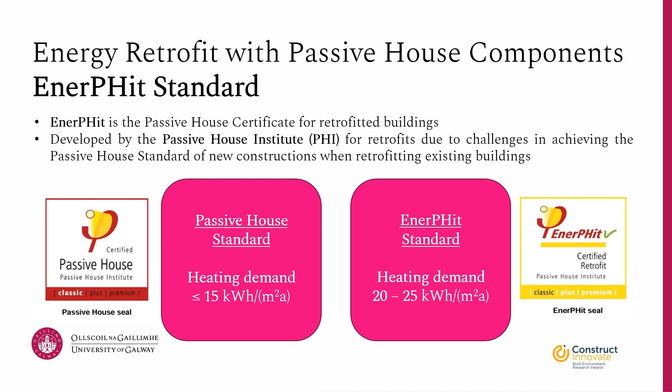As with passive house design, the EnerPHit standard can be achieved by applying the 5 key principles of passive house. So that means focusing on thermally insulating the building, using passive house windows, implementing an adequate ventilation strategy, focusing on airtightness, and removing thermal bridges through design.

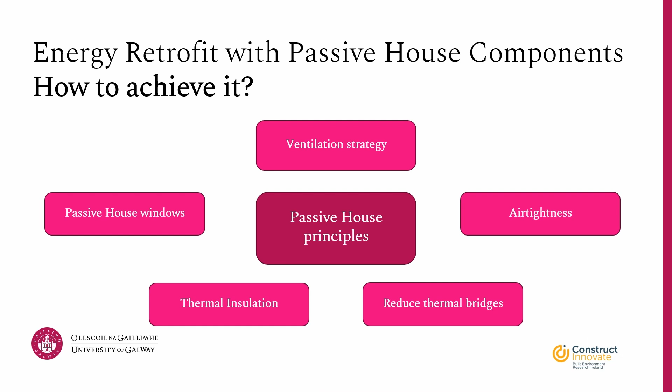So achieving the EnerPHit standard can have economic benefits. It can also result in an improved indoor environment through thermal comfort improvements, improved air quality, no mold growth, and a constant supply of fresh air. And it can also have significant space heating demand reductions as well as CO2 emission reductions.

As well as that, the EnerPHit certification process offers a documented quality assurance and acts as an important opportunity to apply higher quality and higher efficiency measures than you would otherwise have considered. And it also acts as an incentive for building owners to strive for a higher energy efficiency standard than they would otherwise have considered.

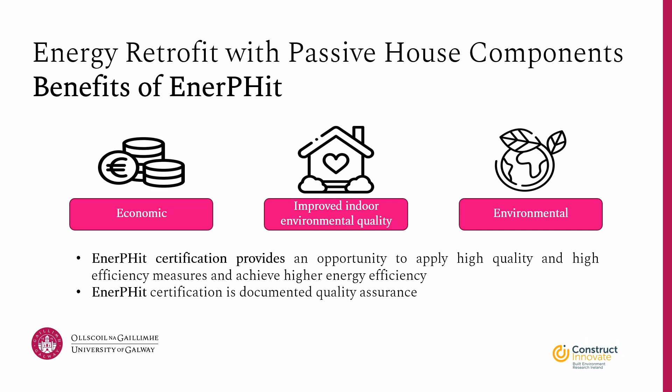So PHPP is used to determine the energy performance of the retrofitted building, and there are two ways that you can fulfill the EnerPHit criteria. So that's by component or by energy demand. In the component method, each component of the building, so for example your insulation, your windows, your ventilation system, must comply with a limiting value that's set out in the criteria and comply on airtightness and primary energy demand criteria. In the energy demand method, the retrofitted building should meet a certain energy demand that's specific to the climate zone.

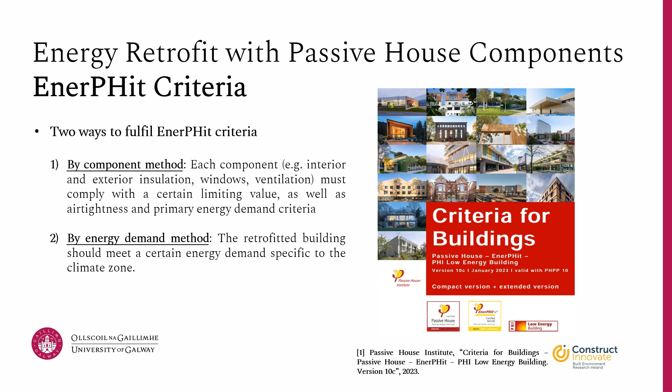So you can see that for the component criteria, specific heat transfer coefficients are presented for each envelope component, as well as for the windows, while minimum heat recovery rates and humidity recovery rates where relevant are specified across the different climate zones according to the PHPP. Ireland would be considered a cool and temperate climate, and therefore you would comply with those values specified for this climate zone.

So alternatively, you can use the energy demand criteria, and again, these are specific to the climate zone. So again, for Ireland, you would look at the cool temperate climate, and therefore you'd see that the max heating demand for an EnerPHit standard in Ireland would be 25 kWh per metre squared per annum.

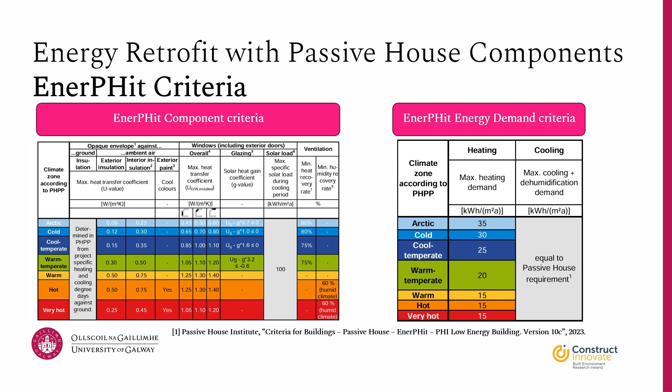So there are some exemptions specified in section 2.2.4 of the criteria for buildings that, where applicable, allow the heat transfer coefficients of the external envelope to be exceeded. So that includes things like legal requirements, if it's a historical building, if the required measures aren't cost effective, if the required insulation level restricts the building's use or the surrounding areas, if there aren't components available that comply on both EnerPHit criteria and other requirements, so it could be fire safety, if thinner insulation is required in the case of interior insulation to avoid moisture damage, or if there's another compelling reason related to the construction of the building.

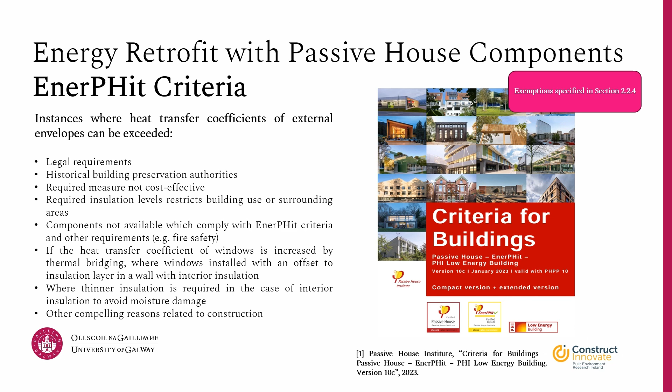So regardless if you're using the component or energy demand method to fulfill the EnerPHit criteria, you must always comply on airtightness and primary energy demand criteria. So for airtightness, that includes a pressurization test result of less than or equal to 1 air change per hour. So that is less strict than the passive house standard requirement of 0.6 air changes per hour. And the renewable primary energy demand criteria are the same as set out in the passive house standard.

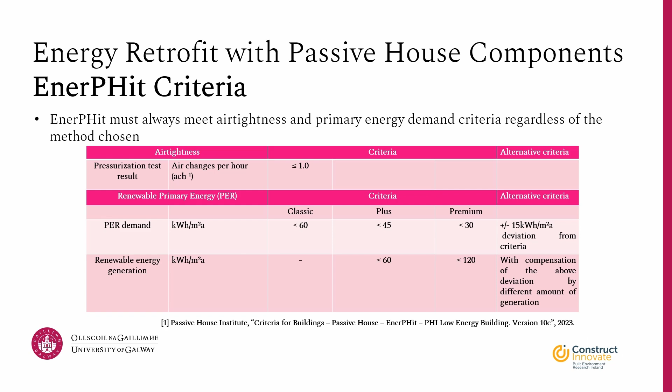So both passive house and EnerPHit buildings offer optimum standards of thermal comfort, user satisfaction, and protection against moisture damage. And so there are minimum criteria set out in section 2.4 of the criteria for buildings that both EnerPHit and passive house buildings must meet. And so that includes requirements relating to the frequency of overheating in the building, the frequency of excessively high humidity levels, ventilation criteria relating to volumetric flow rates, controllability, humidity levels, sound level and any drafts, minimum thermal comfort criteria, moisture protection criteria and occupant satisfaction criteria.

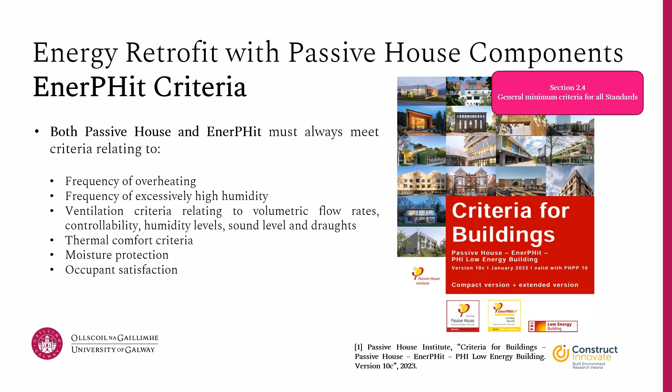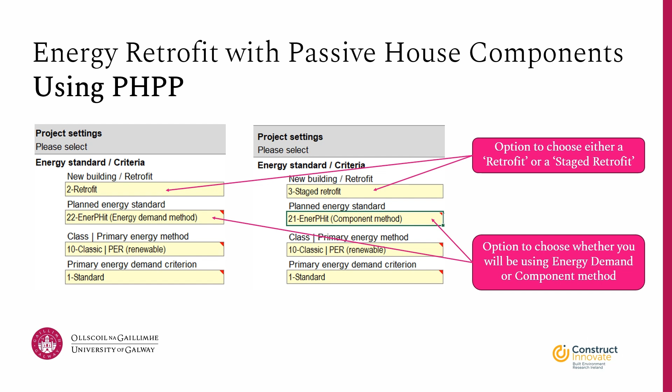So within PHPP, you can specify in the project settings whether you'll be dealing with a new building or a retrofit, and whether you plan to achieve the energy standard through the energy demand method or the component criteria highlighted here. As well as that, you can specify if you're achieving the EnerPHit standard through a complete retrofit or through a staged retrofit. So a complete retrofit would have benefits in that occupants only have to bear the disruption of the works once, compared to if they were doing works in a staged manner. However, a step-by-step retrofit has its own benefits in that the costs can be spread out over time without compromising on quality.

If you are doing a step-by-step retrofit by building component, you might first look at replacing the windows, addressing airtightness and installing your ventilation system. Then later, as another step, you might insulate the building, and then finally move on to installing your new heating systems and renewable energy systems to finally achieve the EnerPHit standard. Or you might focus on retrofitting certain building parts or sections, so that might be the case for apartments or terraced houses. Regardless of what you do, the most important thing is to consider the challenges of a step-by-step retrofit.

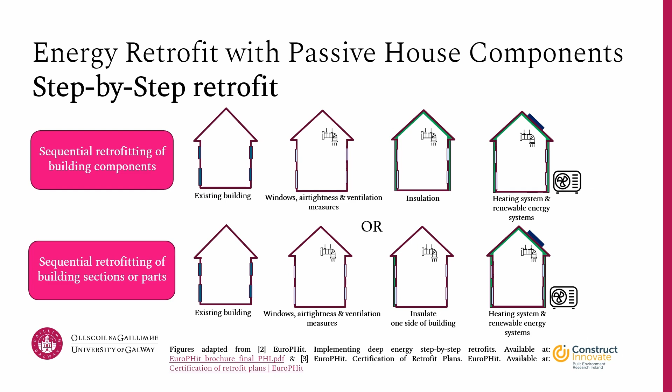So that includes keeping any interdependencies between the retrofit measures in mind. So that could be any interdependencies between the connection details and the chronological order of the measures, or any functional dependencies between the measures to avoid lock-in effects. Therefore, an overall concept and plan is essential to conducting a step-by-step retrofit. So the EnerPHit retrofit plan is the overall plan for step-by-step retrofits. It is a document for building owners that takes into account all of the interrelationships between the different energy-saving measures and allows an optimal final result to be achieved.

So the ERP is generated based on imports from the completed PHPP file, and it contains useful information on all the measures as well as the overall energy improvements of each step. And it is a prerequisite for the EnerPHit pre-certification process, which can be obtained in the case of step-by-step retrofits. So pre-certification verifies the possibility that the plan outlined will achieve the EnerPHit standard when it is complete.

So to achieve pre-certification, you must first have your ERP submitted, and the first step of the retrofit must be complete as specified in the ERP, and the primary energy demand must have reduced significantly from the initial state. Then once pre-certification is obtained, the rest of the works can be completed as per the plan, and then finally the EnerPHit standard will be achieved.